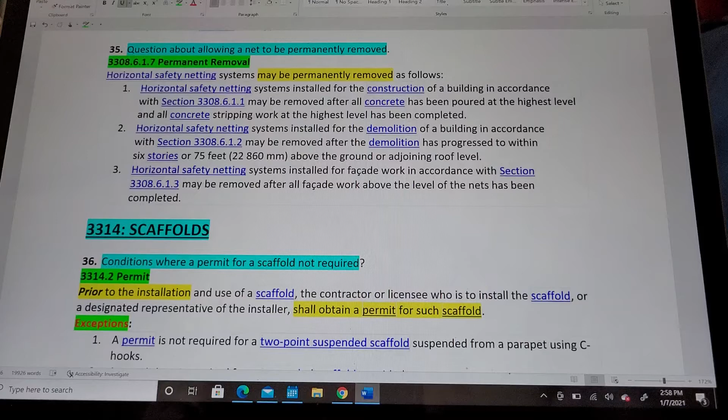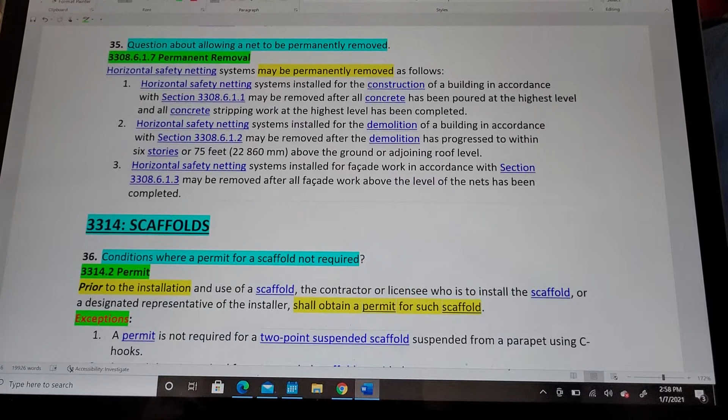Question 35, question about allowing a net to be permanently removed. Horizontal, if you go to 3308.6.1.7, permanent removal, horizontal safety netting systems may be permanently removed as follows.

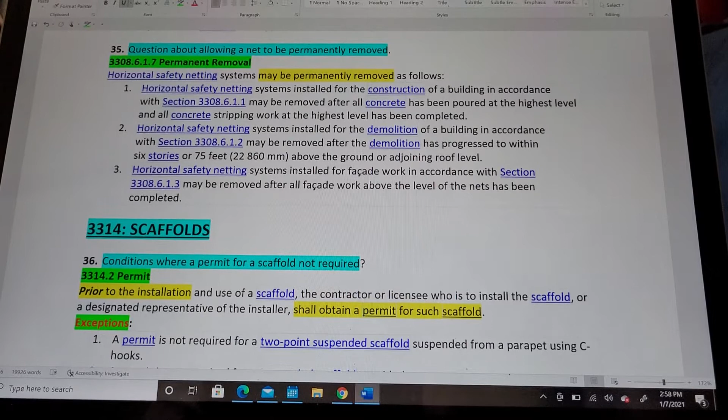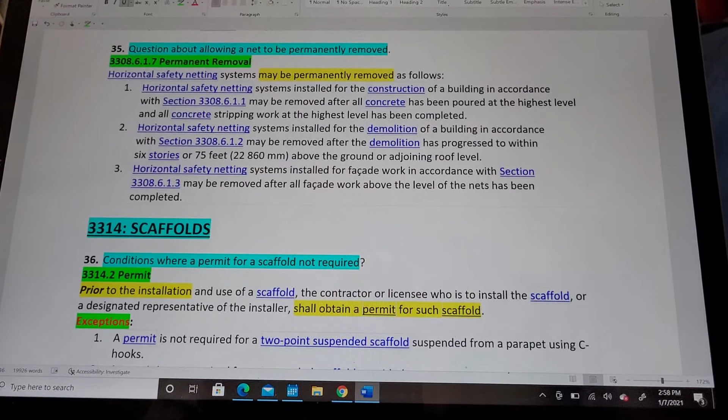1. Horizontal safety netting systems installed for the construction of a building in accordance with section 3308.6.1.1 may be removed after all concrete has been poured at the highest level and all concrete stripping work at the highest level has been completed.

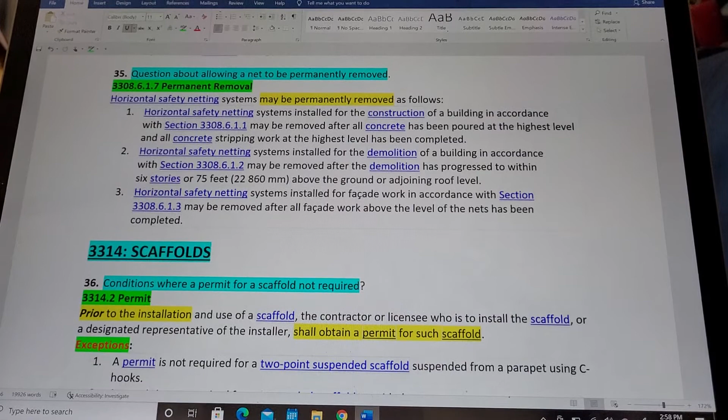2. Horizontal safety netting systems installed for the demolition of a building in accordance with section 3308.6.1.2 may be removed after the demolition has progressed to a level within 6 stories or 75 feet above the ground or adjoining roof level.

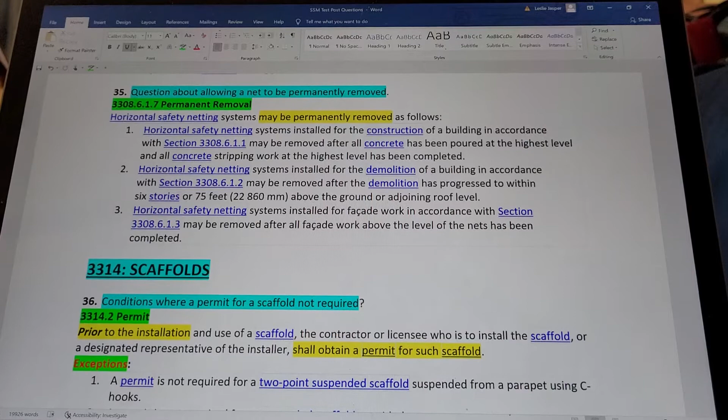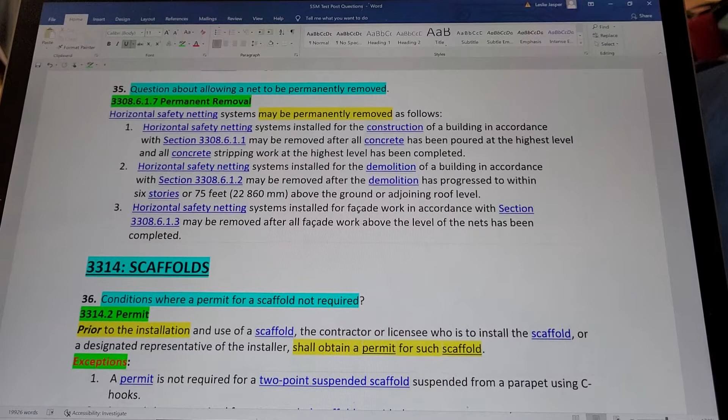Section 3. Horizontal safety netting systems installed for facade work in accordance with section 3308.6.1.3 may be removed after all facade work above the level of the nets has been completed. And I didn't add those sections, but I probably will later.

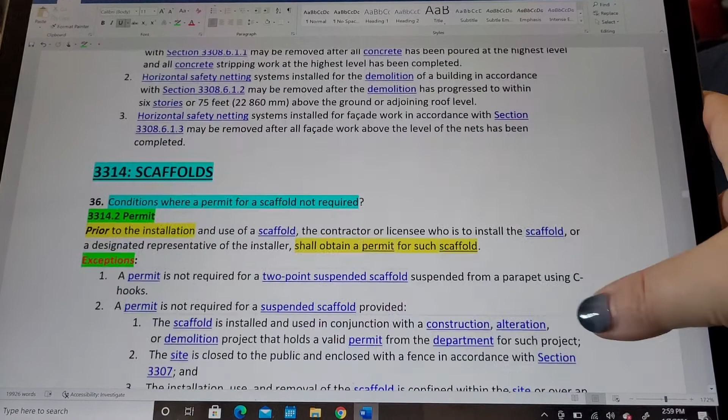Moving on to 36, we're in the scaffolds realm. Conditions where a permit for a scaffold is not required. If you go to 3314.2 permit, prior to the installation and use of a scaffold, a contractor or a licensee who is to install the scaffold or a designated representative of the installer shall obtain a permit for such scaffold.

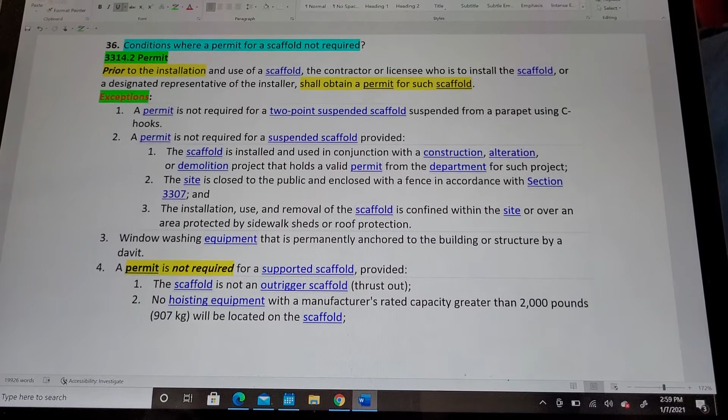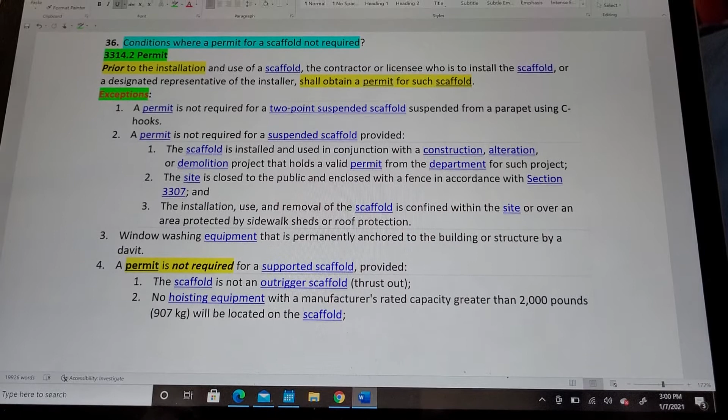Exceptions. A permit is not required for a 2-point suspended scaffold suspended from a parapet using C-hooks. 2. A permit is not required for a suspended scaffold provided 1.

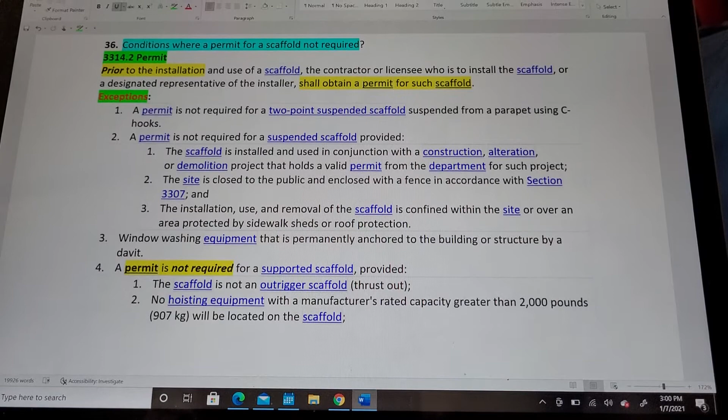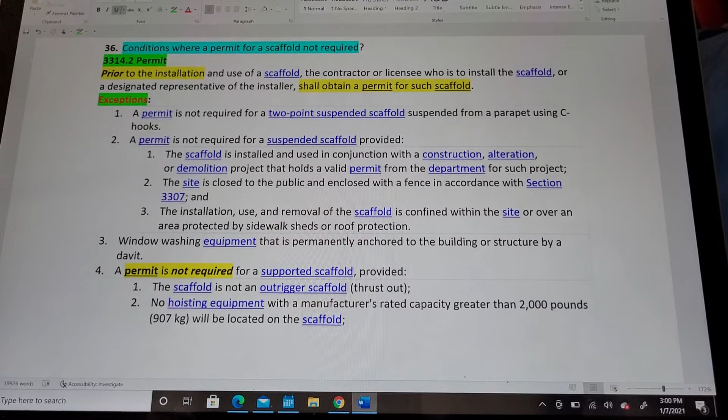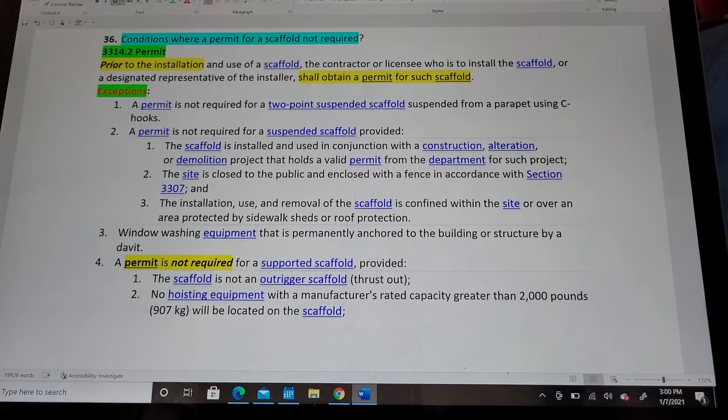The scaffold is installed and used in conjunction with a construction, alteration, or demolition project that holds a valid permit from the department for such project. 2. The site is closed to the public and enclosed with a fence in accordance with section 3307. 3. The installation, use, and removal of the scaffold is confined within the site or over an area protected by sidewalk sheds or roof protection.

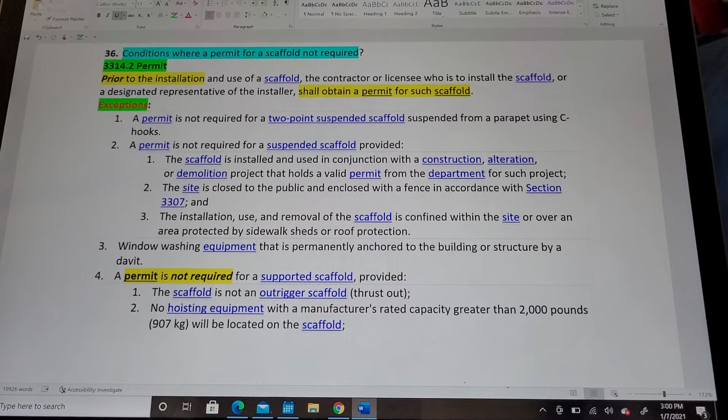3. Window washing equipment that is permanently anchored to the building or structure by a davit. 4. The one I was particularly interested in because I've seen that as a test question.

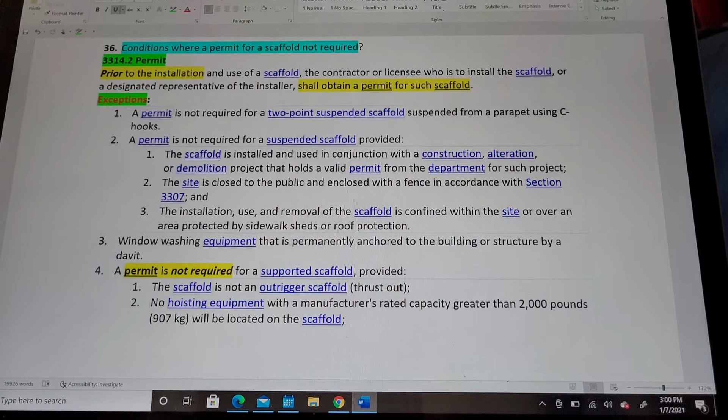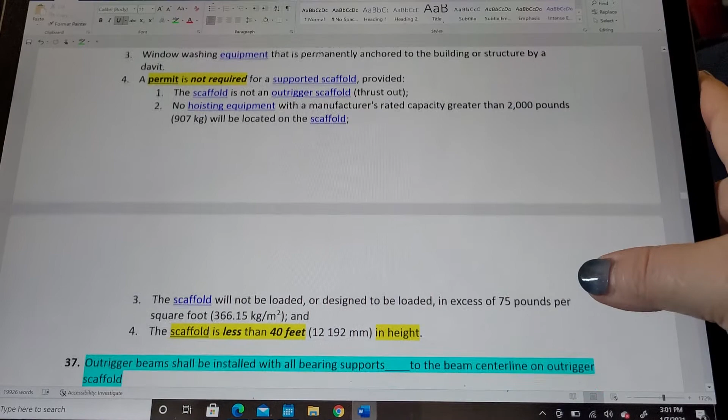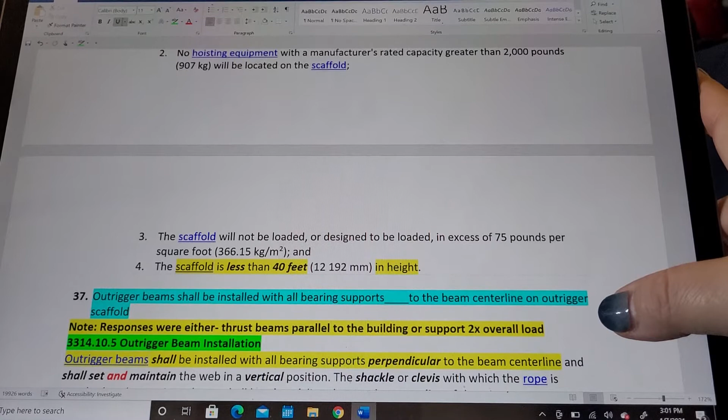A permit is not required for a supported scaffold providing 1. The scaffold is not an outrigger thrust out. 2. No hoisting equipment with a manufacturer's rated capacity greater than 2,000 pounds will be located on the scaffold. 3. The scaffold will not be loaded or designed to be loaded in excess of 75 pounds per square foot. And 4. The scaffold is less than 40 feet in height.

That was a test question, so I highlighted that, even though I included everything else for study purposes.

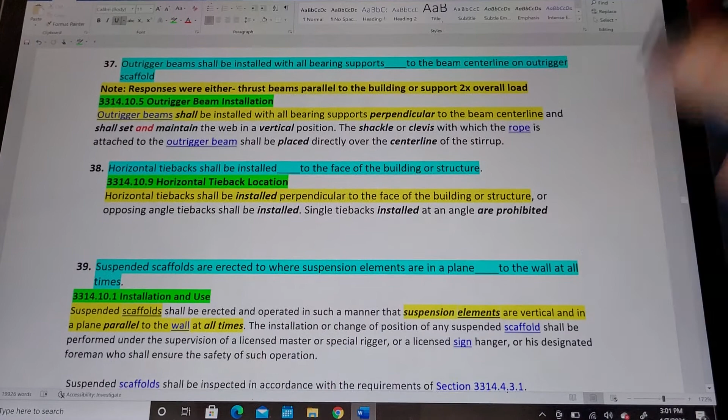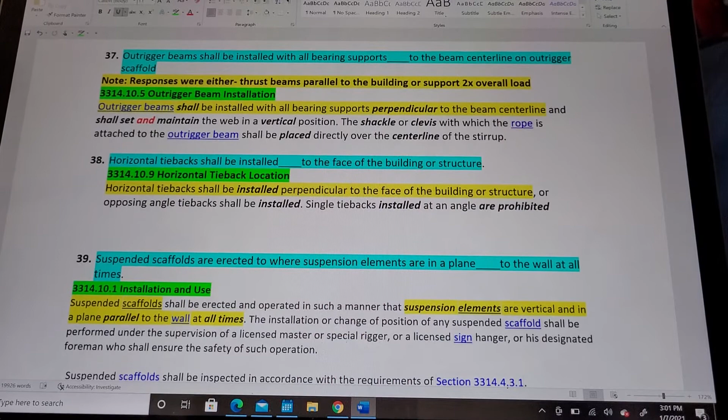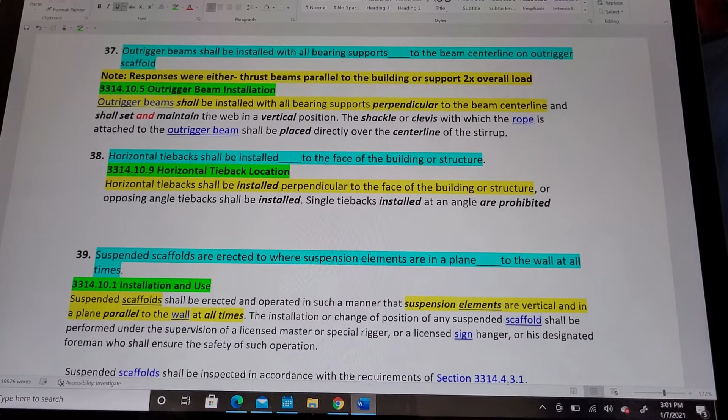37. Outrigger beams shall be installed with all bearing supports blank to the beam centerline on outrigger scaffold. If you go to 3314.10.5, outrigger beam installation, outrigger beams shall be installed with all bearing supports perpendicular to the beam centerline and shall set and maintain the web in a vertical position.

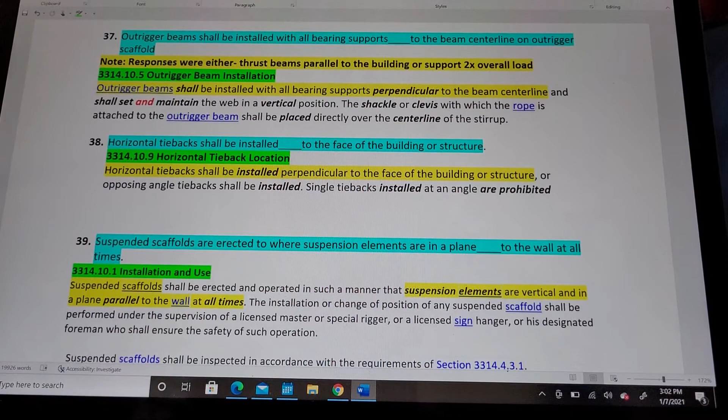The shackle or clevis with which the rope is attached to the outrigger beam shall be placed directly over the center line of the stirrup.

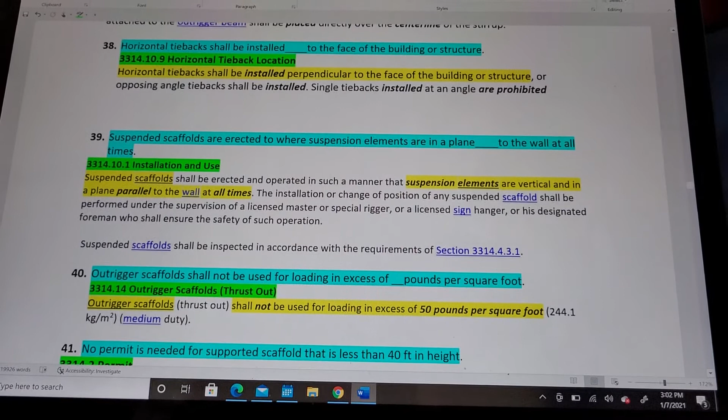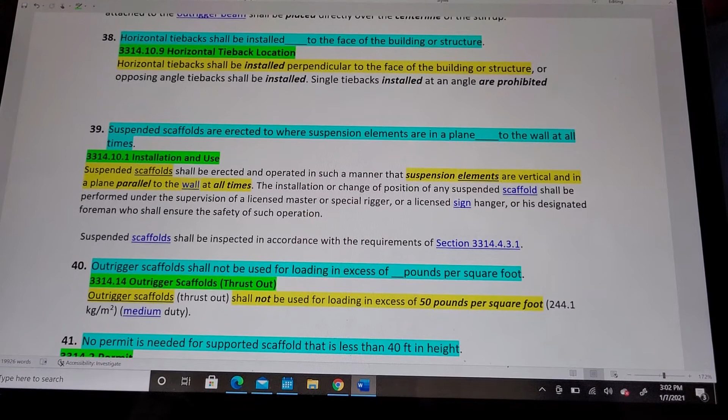Question 38. Horizontal tiebacks shall be installed blank to the face of the building or structure. If you go to 3314.10.9, horizontal tieback location, horizontal tiebacks shall be installed perpendicular to the face of the building or structure, or opposing angle tiebacks shall be installed.

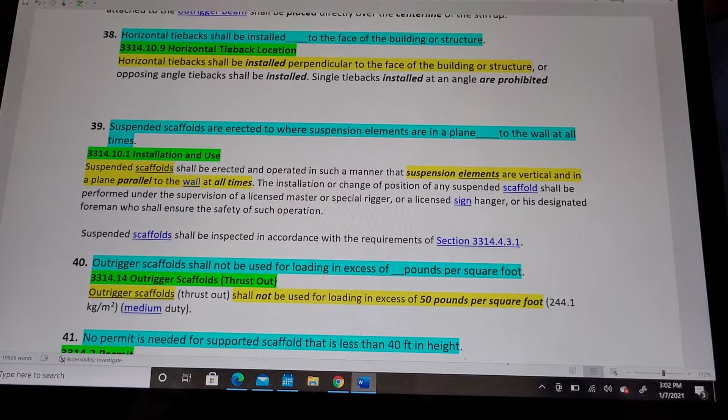Single tiebacks shall be installed at an angle. Single tiebacks installed at an angle are prohibited.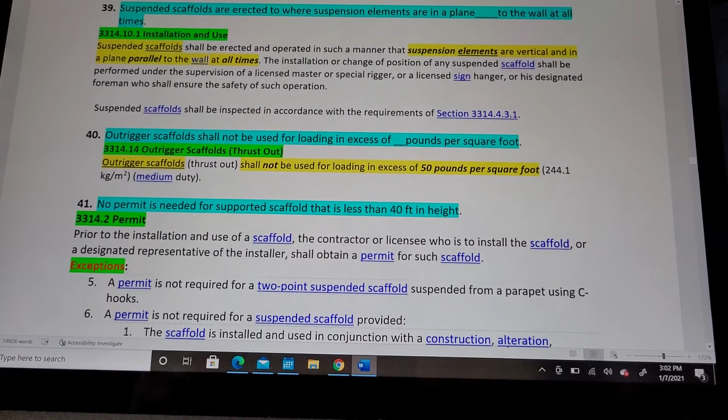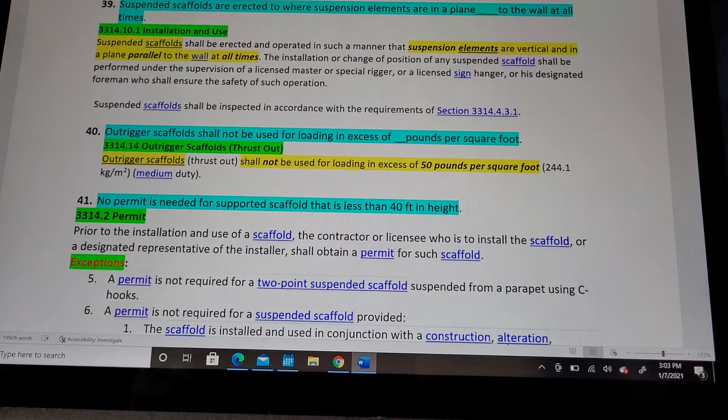Question 39. Suspended scaffolds are erected so that suspension elements are in a plane blank to the wall at all times. If you go to 3314.10.1, installation and use, suspended scaffolds shall be erected and operated in such a manner that suspension elements are vertical and in a plane parallel to the wall at all times.